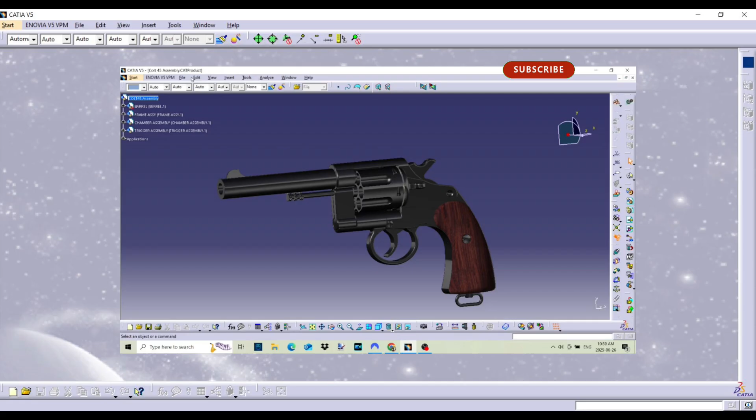In this video we shall be looking at producing a detailed drawing for the Colt 45 Army pistol that we assembled a while back. We shall be looking at producing some detailed views and a bill of materials. So CATIA is running, so let's get started. First, we need to open the Colt 45 assembly and create the drawing sheet.

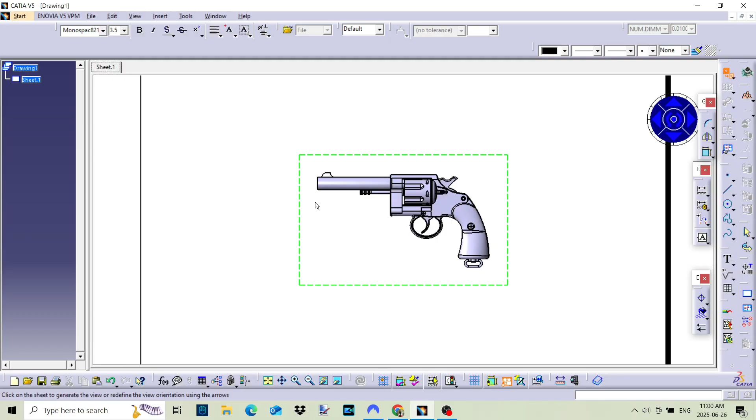With the drawing created, we can now create the first views. There is a video that shows this in detail. The link is at the top. We can now create the other views required and add some overall dimensions.

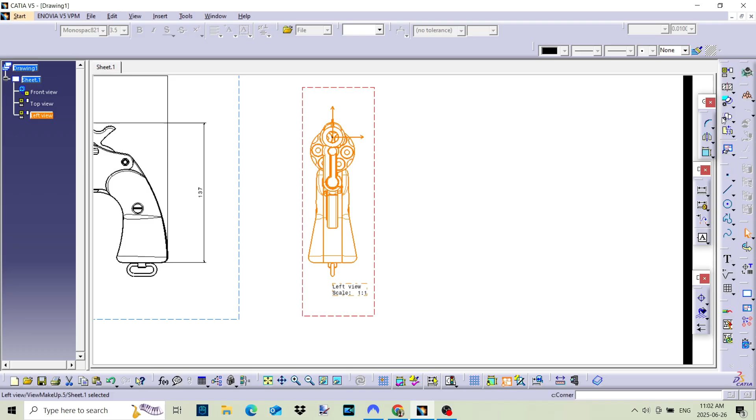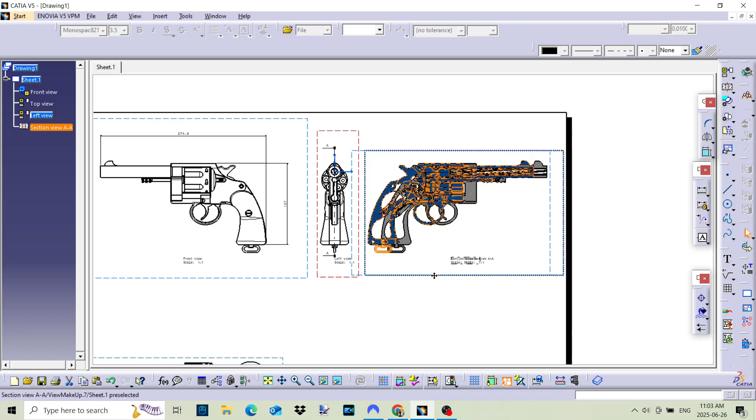The next view will be a section view down the center of the left view. We can see that the sections have been filled with solid colour that will need to change. We can do this by clicking on the pattern and changing the properties. It is probably best to change the setting in Tools, Options, but we have the view generated, so let's go with it.

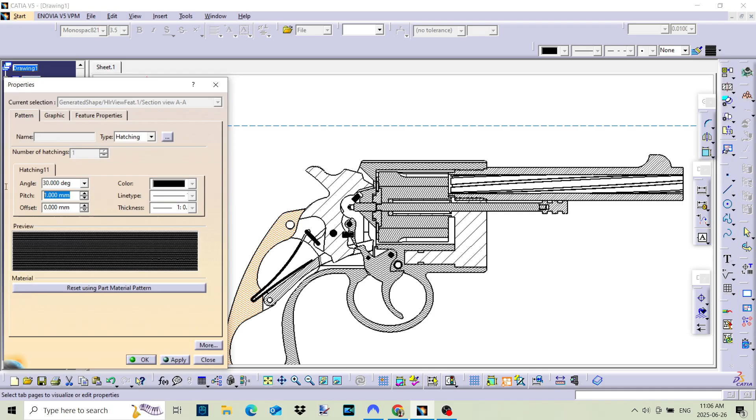The next thing we shall do is create the call-out balloons. We can do this automatically. To create the balloons, we need to select the view we want the balloons to be created in, and then we have to go back to the 3D window. In this example, I had to open the 3D assembly again, as CATIA had crashed.

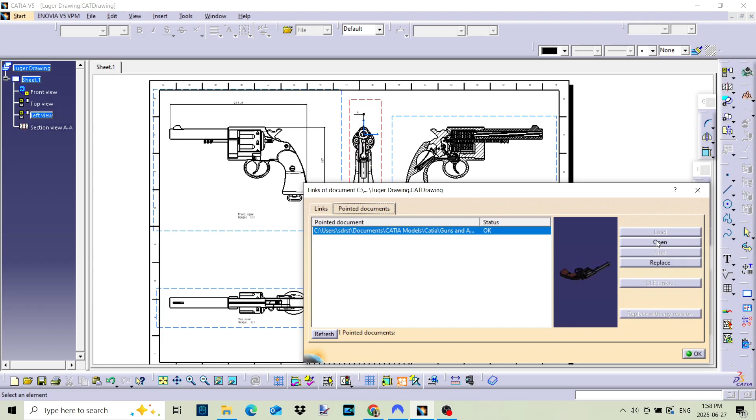Opening the 3D via links will make sure that the assembly you are working on is the assembly linked to the drawing. Once in the assembly, click on the Generate Numbers icon. In the window, we can choose numbers or letters, then click OK.

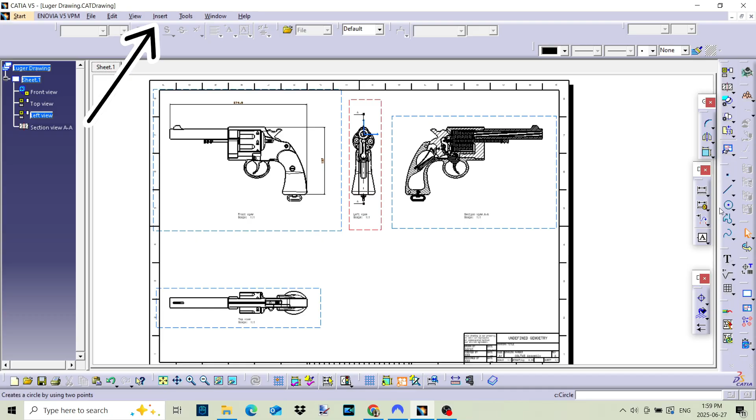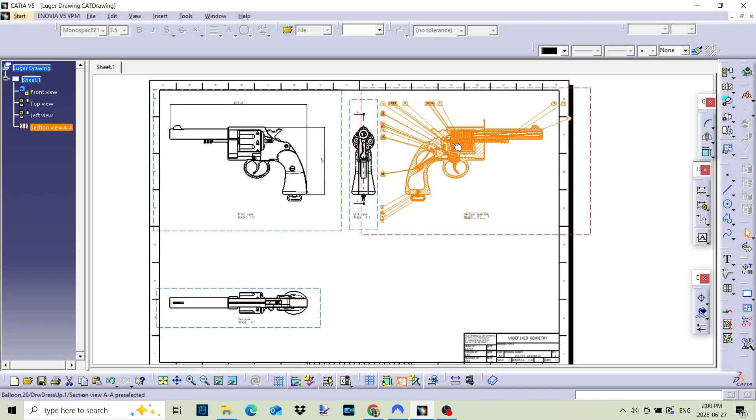We then return to the drawing sheet and select Insert from the menu line, then pick Generation, Balloon Generation. OK, wrong view selected. Let's do that again on the section view. Better. We now need to move the balloons into a readable location and make the view presentable.

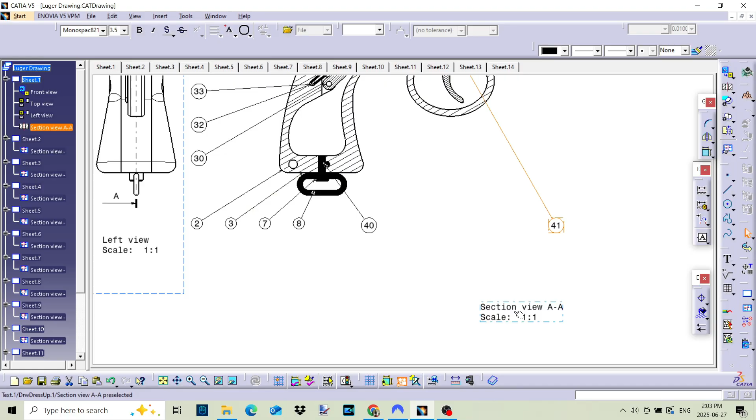Now we can create the BOM. Once again, to create the BOM we have to return to the 3D window. From the menu bar, select Analyze, Bill of Material. This will open the Bill of Material window. For this exercise we want the item number displayed, so we need to change the format of the BOM.

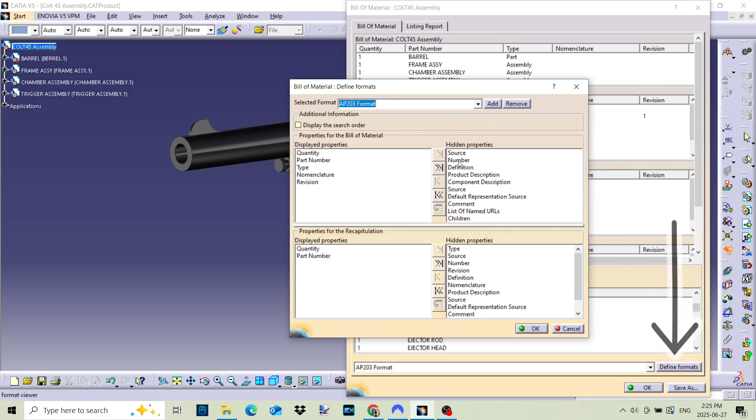We do this by clicking on the Define Format button and selecting Number from the list of hidden properties and moving it to the displayed side. We also want the item number to be displayed first, so we can change the position. We now see that the item number is displayed. We can now return to the drawing sheet and place the BOM on the drawing.

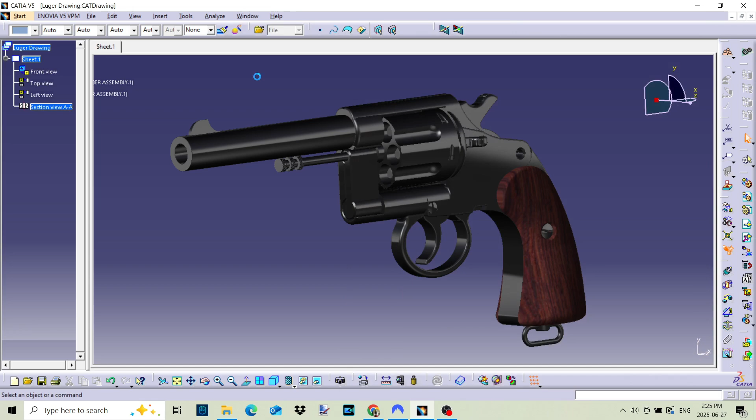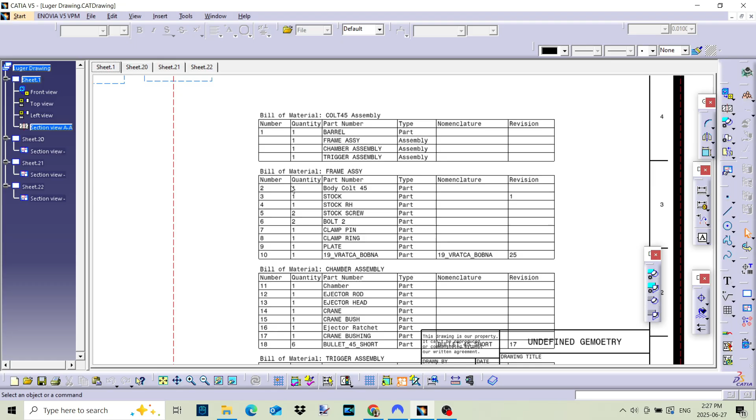From the menu bar, select Insert, Generation, Bill of Materials, and select the location on the drawing sheet for the BOM. The BOM will be produced. Sometimes part of the BOM will be added to a new drawing sheet, but we can copy and paste it to the required sheet. We just have to move the tables about to make it look presentable, and there we have it. A quickly produced detail drawing with BOM linked to the 3D assembly.

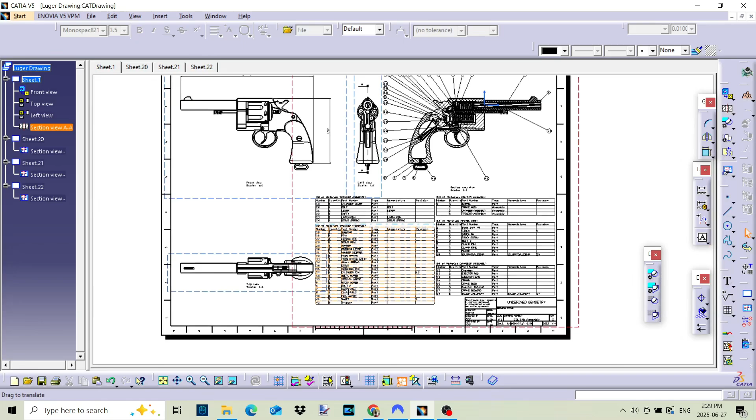And there we have it, a detailed drawing of the classic Colt 45, produced in no time.